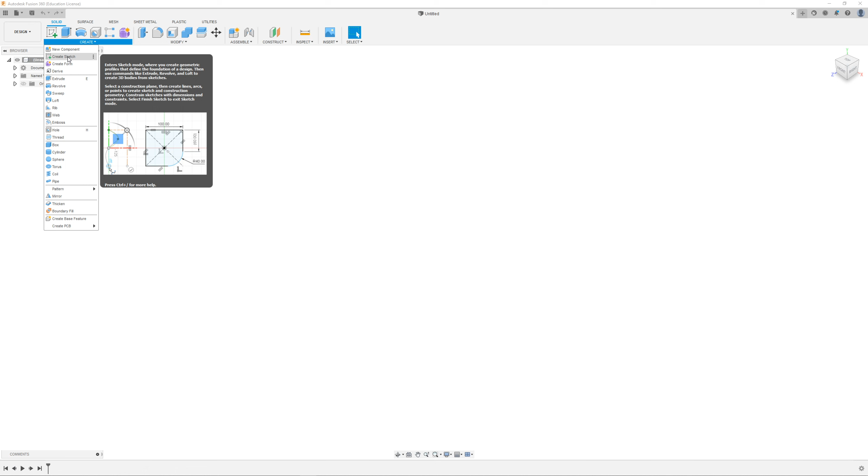So we have here Fusion 360. The first thing we're going to want to do is start by making a new object. So to do that, we are going to press create. We're going to make a sketch, and we're going to sketch in the ZX plane over here. And let's just pick a 2-point rectangle.

I can press this as my starting point, and for the dimensions of my particular piece, we're going to make this out of core flute, but the approximate dimensions, let's say, are 200 by 13 - that's probably a bit big. 200 by... that looks a bit better. No, let's just do that. So 200 by 100 millimeters is the length of the core flute, and we'll get some sort of exotic shapes out later.

So let's press this home button over here in the top right hand corner, and it's going to give us this view so we can see that looks right. We're going to finish the sketch, and so now we have our drawing. We used a rectangle, and because we closed it off, we have the blue border, so it's a blue fill in the inside. Depending on what version of Fusion you have, it might also be yellow, but the point is it's clearly a solid color. So let's make this into a 3D object.

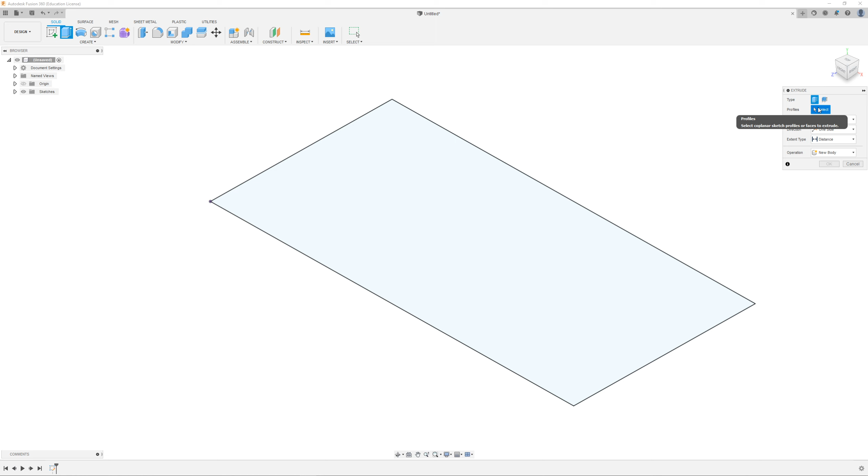Let's go Extrude, and by default we already have this selected. If I didn't have it selected, let me just press the escape button a few times. I'll press Extrude. Let's say I have nothing selected, or when you have multiple shapes and sketches, over here the profile, which is the shape that you want to make into 3D, you're going to click this face over here, and you can click and drag and make it into a 3D object, but I know that our particular piece of core flute is 5 millimeters thick, so I'm just going to press 5. And then everything else here is fine. We don't have to do anything else. We're not tapering it.

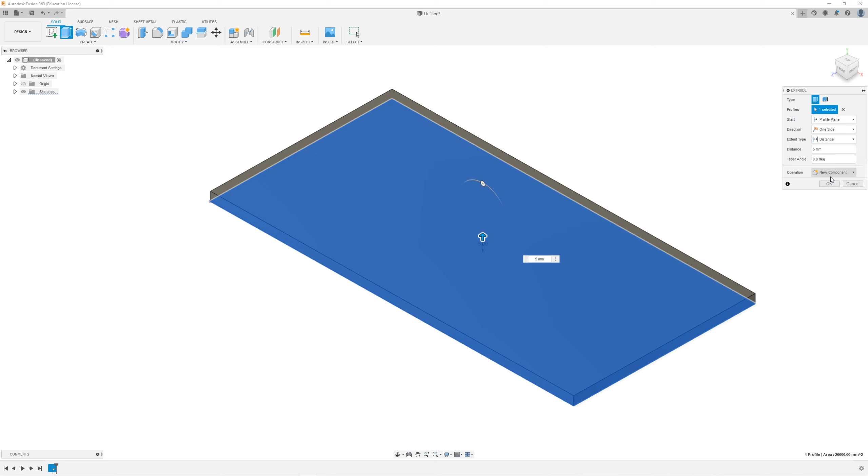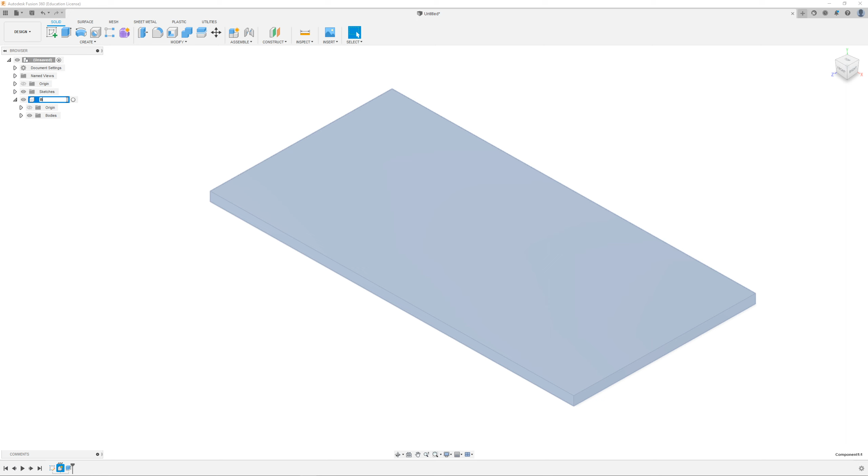We're going to make this into a new component instead of a new body. So press over here, we're going to press new component. This will allow us the option to, if we want to get joints or other components to move relative to each other, we need them to all be individual components. And we press OK, and then if we look over here on the side, we have this is our component, so we can hide it, so that's how we know that that is the component there. And we can rename it by triple clicking it, and we're going to call this the base, so we know what part we're talking about.

So that's our core flute, and we can right click this to make this a physical material. We'll right click this, go to physical material, load up some materials here, we want to make it out of a plastic, and we want an ABS white plastic - this one is probably fine, but let's see if there's any other options. Now core flute, I'm not sure if it's made out of ABS, but it will be good enough for our purposes. So let's just go get ABS plastic. Now we can just click and drag that right over here, and now it's a nice white surface. It's going to look good when we do a rendered drawing.

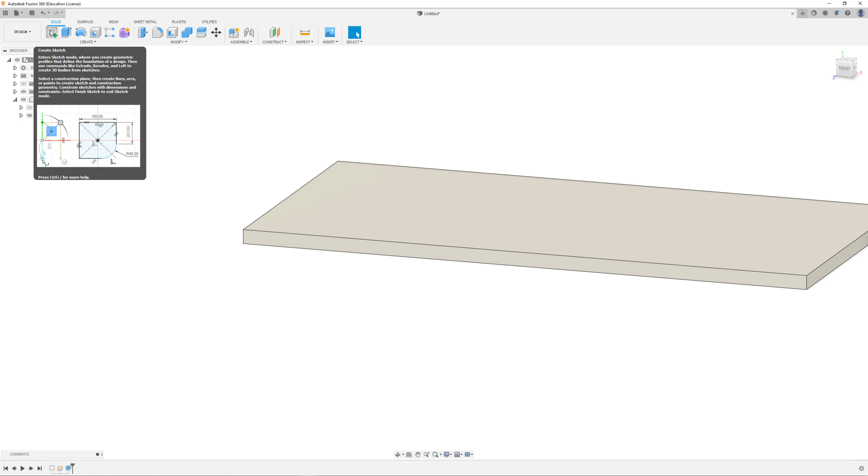So core flute is a piece of plastic that has holes in the middle, so it gives itself relatively good strength for light weight. So we're going to press the sketch button again, and we're going to click the side of our rectangular object over here, and we are going to make the holes for our core flute. So the first thing I'm going to do is I want to make a 5 by 5 millimeter square. I want to get this, I'm going to basically copy this several times.

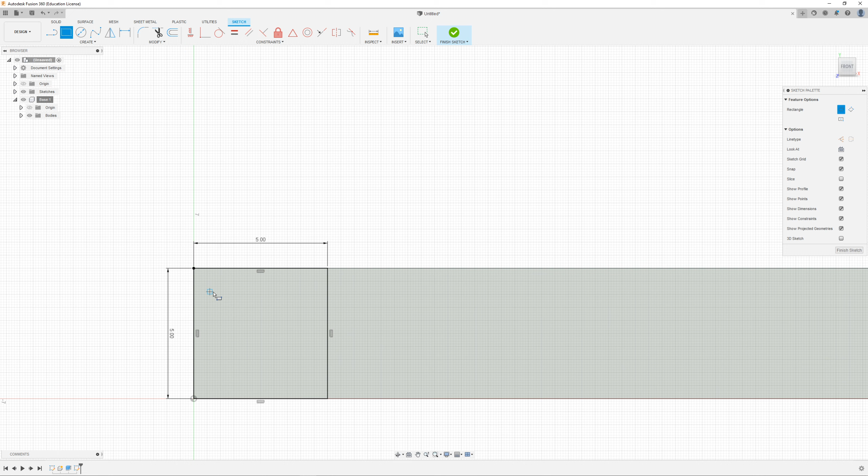So our core flute, let's make a square inside here. How big do we want this internal square? If we make it 4 by 4, that means we've got 1 millimeter of core flute material, which would be fine. If we were to press OK, this would be fine.

The only issue is if we copy this, which I plan on doing to show you the copy tool, see how this wall over here is going to be twice as thick because it's like two pieces of core flute next to each other.

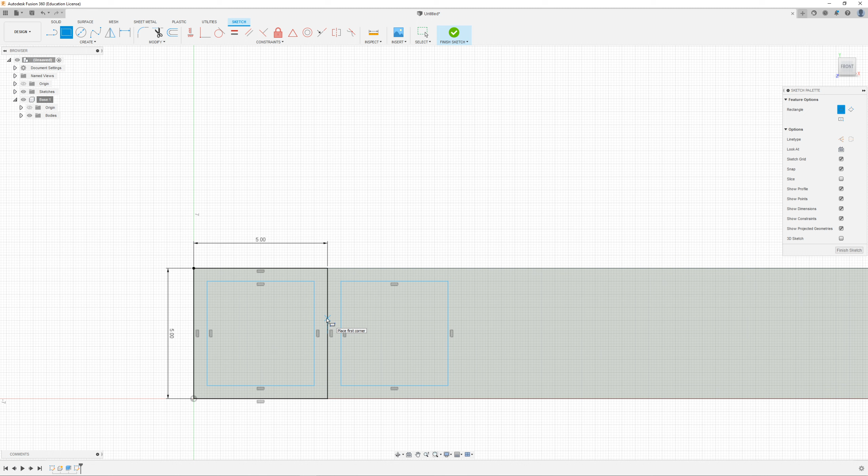So let's modify it. Instead of the core flute being 4x4, we'll press this dimension button. This wall to this wall, since it's 0.5, we want it to be half that size, so we can go 0.5 divided by 2 to give us this length, and we can do the same thing over here, making this 0.5 divided by 2. You can plug in formulas into this text box for Fusion 360.

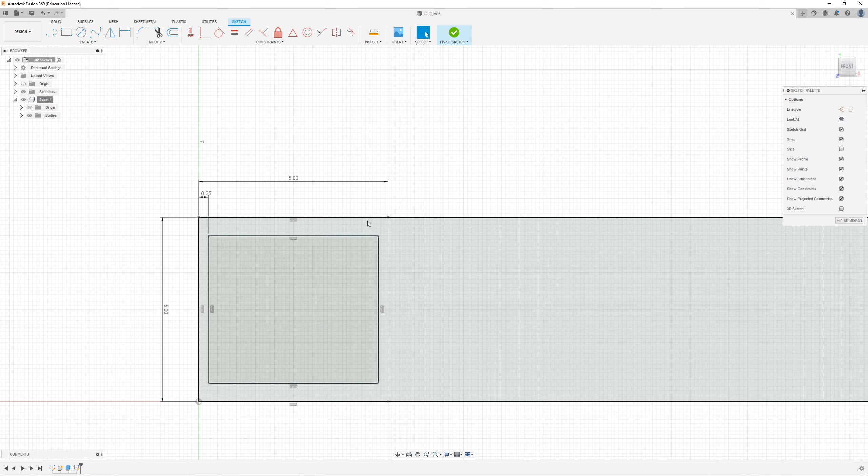I want to delete this other shape so it's not confusing, and also delete this wall and these additional lines because we don't need them anymore. So we have this - it's not exactly a square anymore, it's slightly rectangle. What we're going to do is copy this down our entire piece of plastic so we don't have to draw the individual squares.

We are going to use the rectangular pattern tool. If you press the create button down here and go down to rectangular pattern, it says it duplicates a sketch curve in rows or columns. So click the rectangular pattern. The objects we want to select are all 4 of our lines in this particular example.

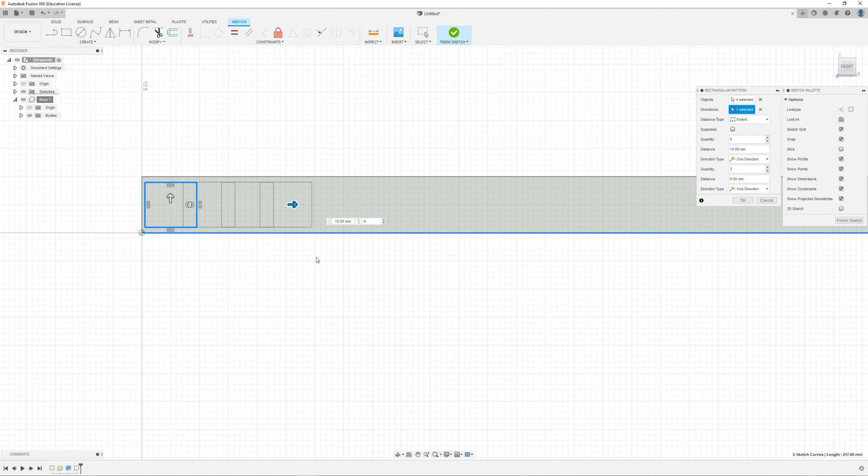Then we want to pick the direction, following either the top or bottom line. Let's do it to the bottom. As we drag this line, see how we already have these squares showing up. So what we want to do is increase our number, and then we can move them so they sort of fit.

One of the options we have here is we've picked extent, which means for this particular length - let's say 50 - it puts 9 or 10 copies for 50 millimeters. Now if I change it to 11 copies, it tries to fit that many inside that extent.

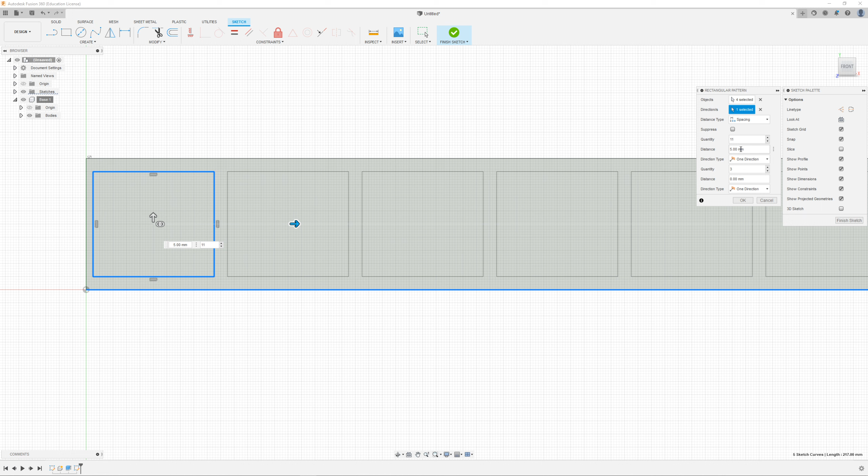What we want to do is instead of extent, change it to spacing. So it says for this shape over here, how long till we go to the next shape? Our square is 4.5 millimeters long, so we want 4.5 plus 0.5, which gives us 5 millimeters.

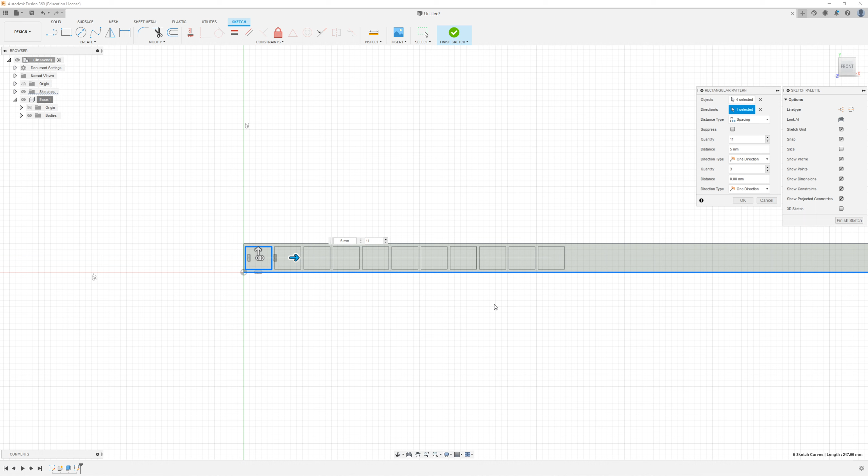Cool, we've done that, and now all we have to do is just increase our number of them until we get to the end of copying it, until we get to the end of our piece of core flute. Then we press OK, and now we automatically have all these rectangles. Now let's finish that sketch.

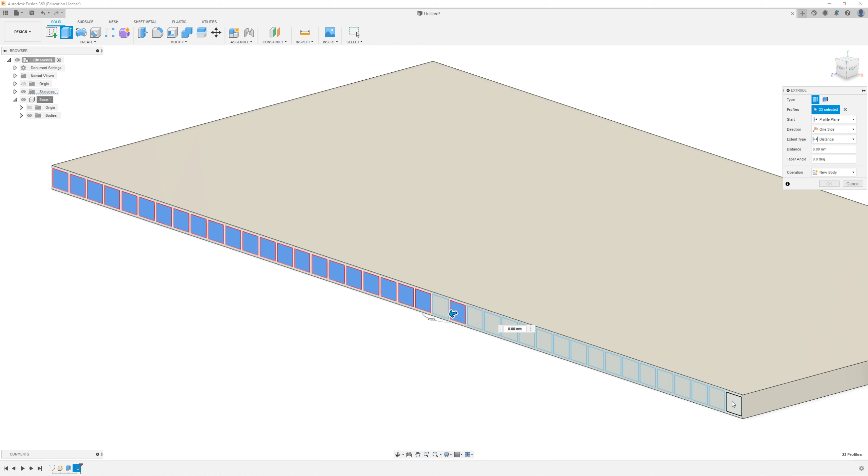So we have these rectangles over here. Let's go press the extrude button again, and we want to select all these squares. Alright, we've selected all these squares.

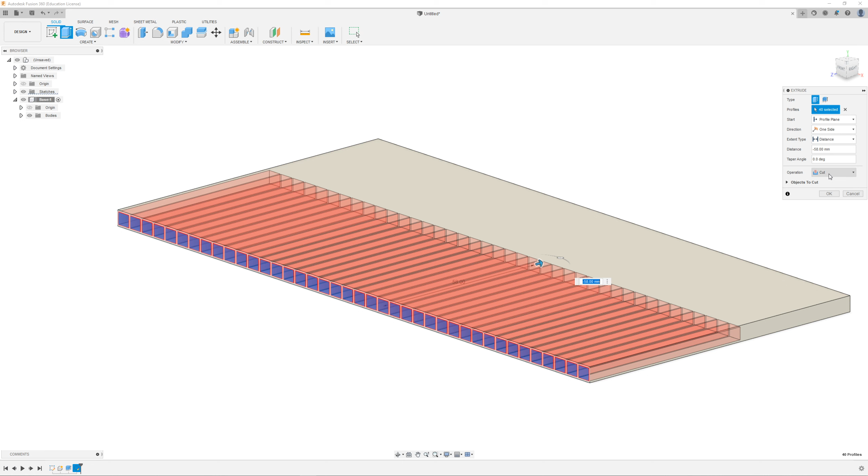Now, when you automatically pull out in Extrude, it's going to make it join, so it wants to make a new object. Instead, we want to bring it into the model, which changes this to cut. So it's going to cut a hole out, which is what we want with our core flute. If we just drag it all the way through the product and press OK, we have now a nice piece of hollow core flute, which will start to look very nice and will mimic our actual model quite nicely.

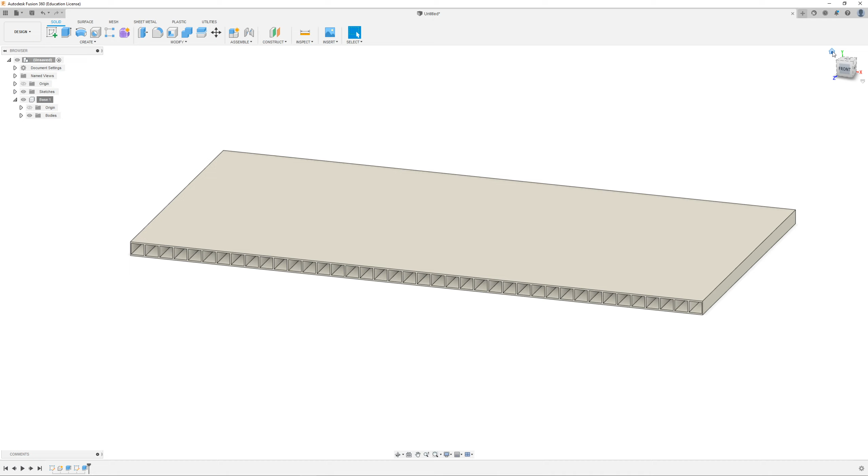We can also, let's go back to our 3D view. Let's say we want to make some interesting cuts - let's say we want to make the front look a bit more sporty. Let's go back to create sketch and press the top again.

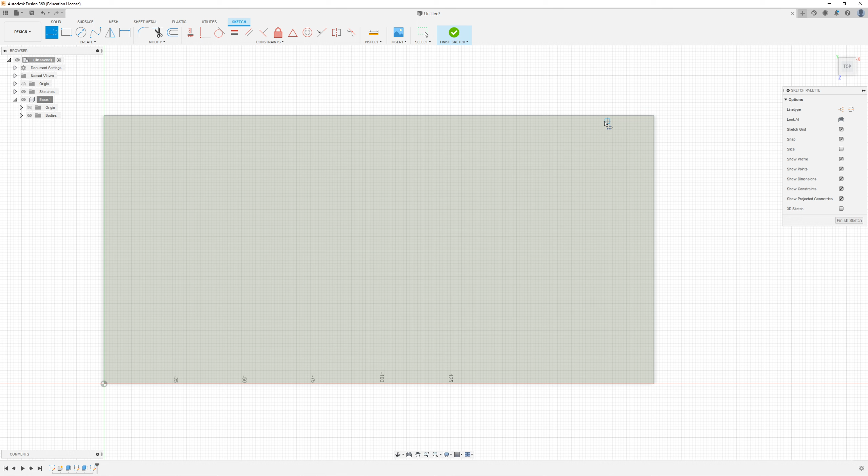Let's say we want to make like a 25 by... we want to make this little angle bit over here, so we want to cut that out of our object. And let's say we then want to be super fancy and also get a fillet over here at the back, so let's make an arc.

We want to press the center over here. All we just want to do is make the back smooth, just to show off things we can do. So notice this shape over here.

Let me just hide the body to explain what I'm saying. Where is that original sketch? We don't want that original... oh, we do want that original sketch. So we want to finish this sketch, and now

we want to cut these two corner bits off. But notice how they're only going to be on one side of the car, so we're going to learn how to use the mirror function as well.

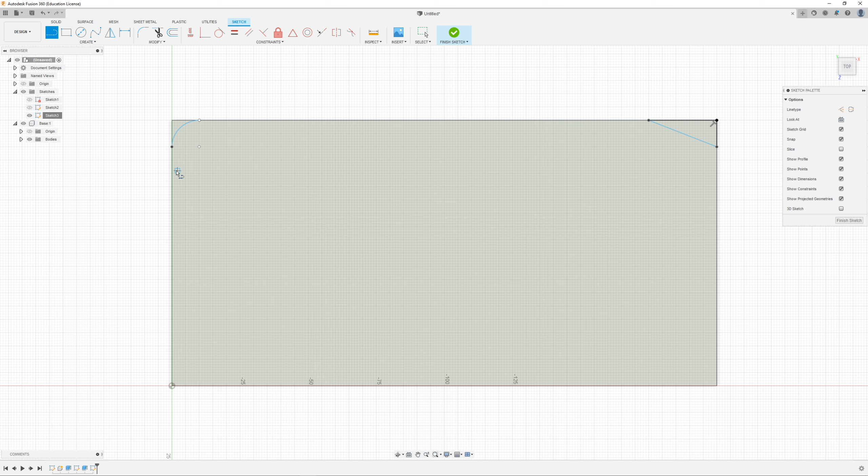Let's go back to that sketch. We can right click that sketch, edit sketch. We want to find the halfway point. If we scroll our mouse down here, we should get to the halfway point, which is what that triangle represents.

Let's just draw that line down here. And we're going to use this tool over here, which is the mirror, which we can also find by pressing down on our create to get mirror.

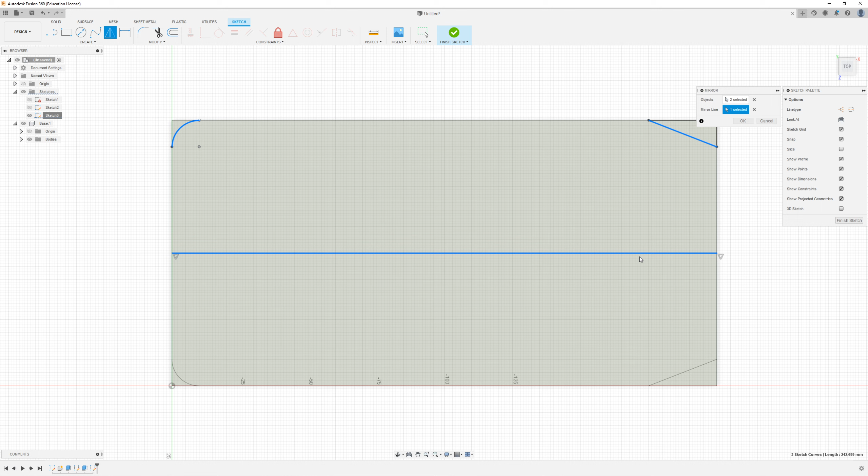We want to mirror this line and we want to mirror this line. So we have two things selected and we want to mirror it down here. So now we have the mirror down there. And if we press OK, exit this sketch, we are going to do the same.

We're going to use the extrude, and we can do the same thing. We can extrude this down and cut it out and it would look cool. But let me teach you another thing that you can add to your arsenal.

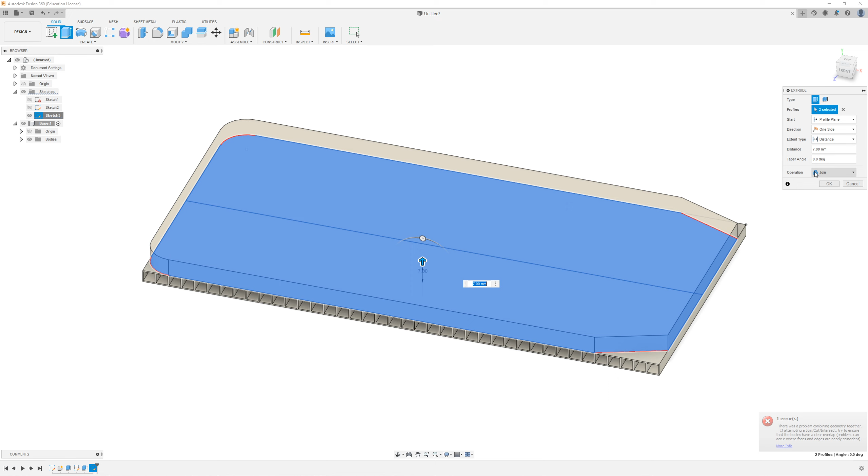We can go extrude. Let's say you want these two inner pieces. By default, we're going to cut them down, which the drawing doesn't like at all. But what we can do instead is we can do intersect.

So what it's saying is for this particular surface, intersect is saying as you go through here, find in this model the parts that overlap between if you were to extrude it and the previous model.

And if I press OK, now we have this nice looking piece of corflute with the extra effort we put in to make these holes. Makes it look really, really nice for our car.

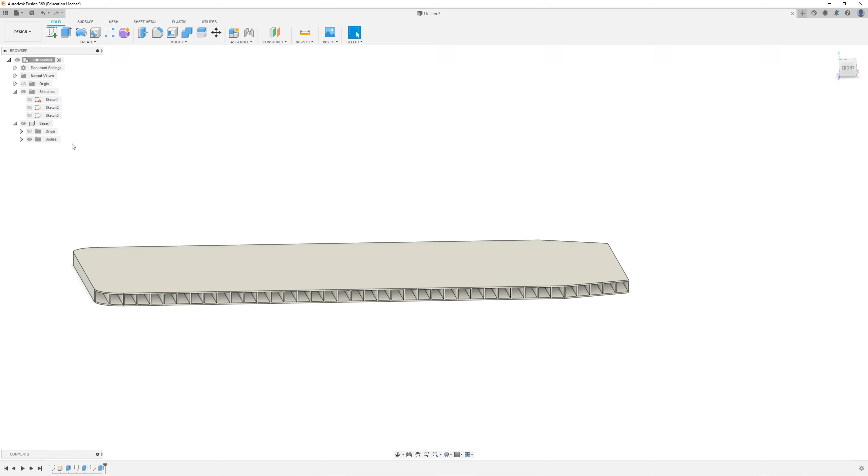Let's go and make a wheel now. So I just want to hide this base, so I don't want it to interrupt our sketching. Let's go press our sketch button.

Let's pick a plane that works for us. Let's do this plane over here. So we want to do this wheel, and let's do just a very simple wheel design.

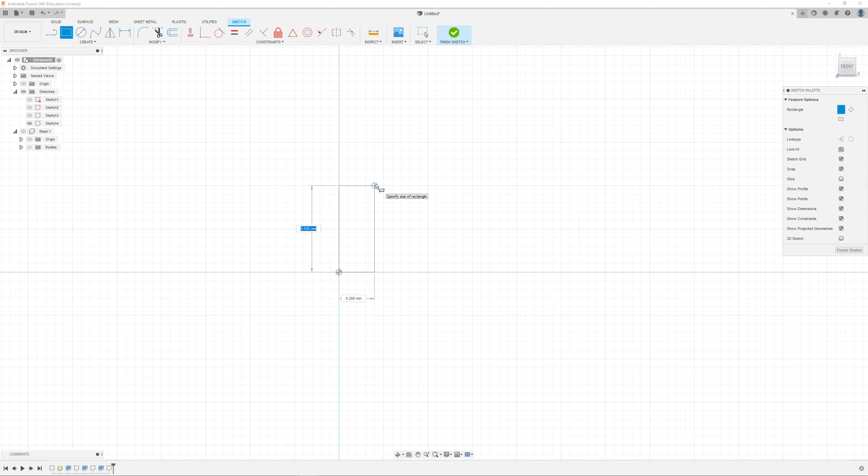Let's say our wheels are, I believe, 50 millimeters. So we're going to do half the wheel and we're going to rotate it. So we want it 25 millimeters high.

Oh wow, we're really zoomed out. 25 millimeters high, and our wheels are 20 wide. And so we'll press OK, and then we'll finish that sketch.

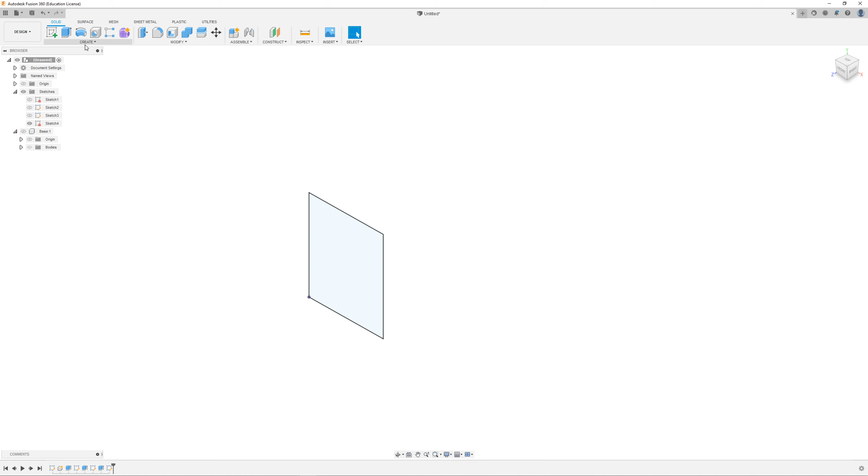We'll go to press the home button. We want to use the Revolve tool. Press the Revolve tool over here, we get a sketch and we rotate it around a particular point. So we can press this Revolve tool over here.

We select that face. The axis we're going to select is the bottom. And if we press that, it makes a nice looking 3D wheel. So this is a very good basic wheel shape we have here.

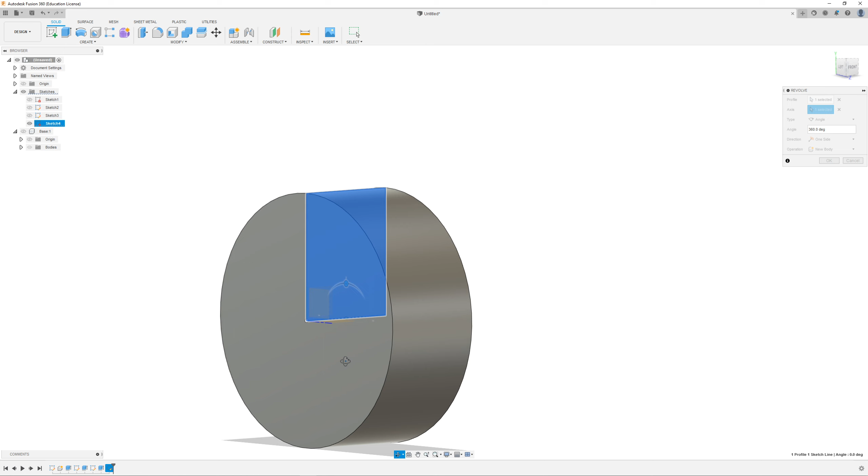But we can also start to be clever and get some free detail into this. So let's go back to that original sketch that we had, this one over here. Edit sketch.

So we know we're going to revolve this sketch, and so we can start using the line tool, and let's start just making a wheel that is going to start to look cool.

So we have this line over here. We know that our wheel goes down to this point over here. I believe actually we can go all the way down to the bottom basically, and then we can bring that out there.

For the outside part of the wheel, let's say we want a line over here, and then this one goes out like that, this line goes out over here.

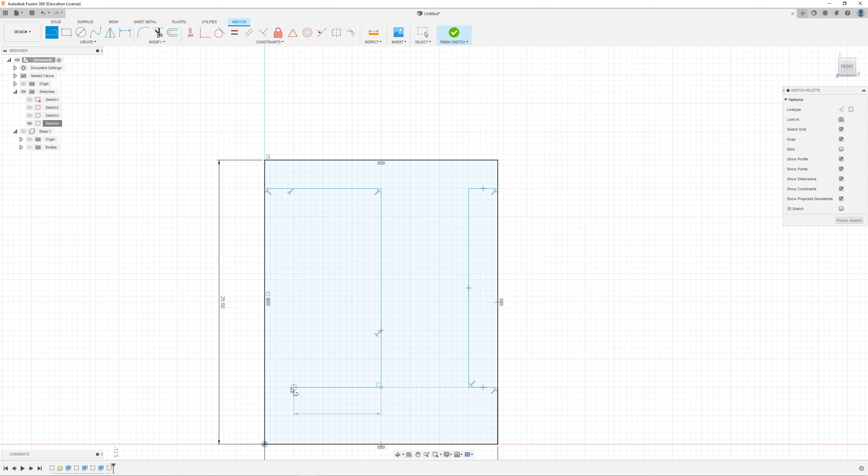We know this wheel is going to accept an axle, and I believe the axle is 3 millimeters thick. So because we assume the axle is 3 millimeters thick, we know we're going to have a little bit of a hollow center. So let's get a line that is 3 millimeters divided by 2, which is 1.5 millimeters, and so we want the wheel to be hollow.

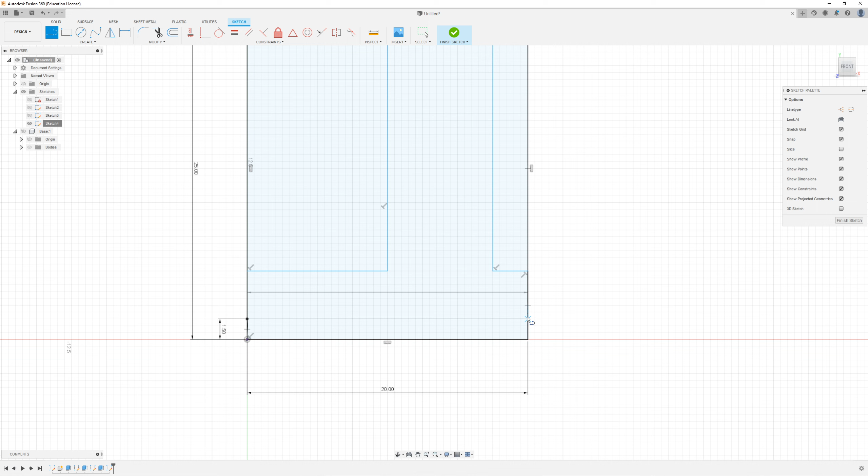Let's say for this particular model, I know our particular wheels in the workshop aren't hollow all the way through, but let's say some of them are, so it's going to look cool. So this is our shape. It looks like a weird looking I.

If we finish that sketch and go into 3D, we can do the same thing with Revolve. We just want to press this inner shape, and we want it to revolve around here. So now we're starting to get a nice looking wheel that looks similar to the wheels you see in our workshop.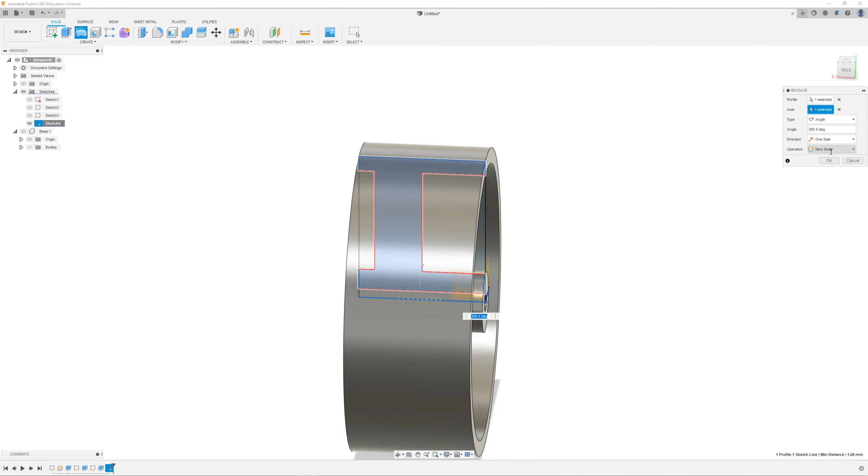And again, we want to make this a new component, make it into something into 3D. Cool, we have this lovely component over here. This is our wheel, and we can also start to add some extra features to this wheel.

Let's say this particular wheel, if we open over here, we can go to bodies. This particular body is going to be black ABS. So let's say ABS black. We want this, and then we know that the outside of the wheel is going to have rubber. So let's make the outside of the wheel while we have this model.

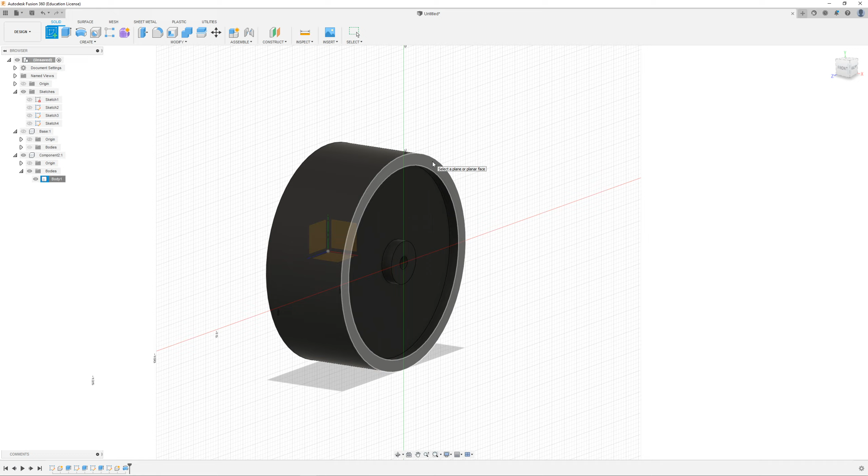We'll go to sketch, and then let's press this surface over here. We want the outside of our wheel to be, let's say, 2 millimeters of rubber. Finish that.

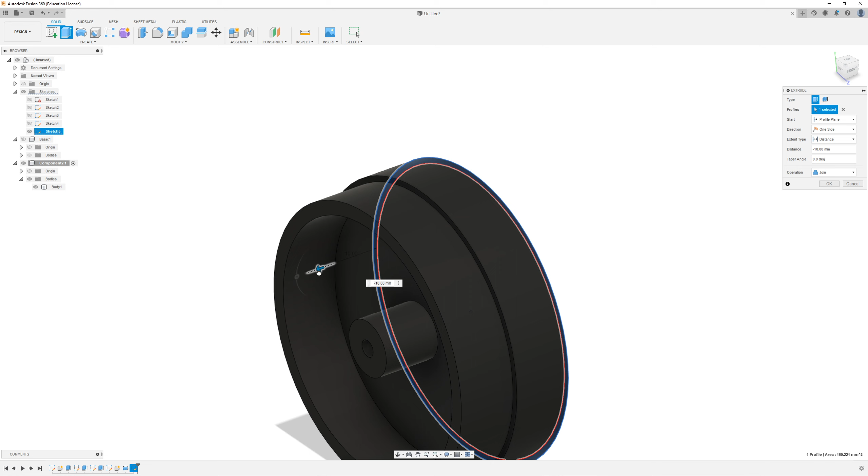We want to press just this surface over here. We're going to extrude this, and we want this to go over the entire length of the wheel. And we don't want this to join. We want this to be a new body.

Oh okay, this is a new body. But the problem we have here is this is the component that we just had, the wheel. When we made a new body, by default it wants to make the bodies in whichever is the active component. And if you don't select an active component, it's going to want to be produced in the origin.

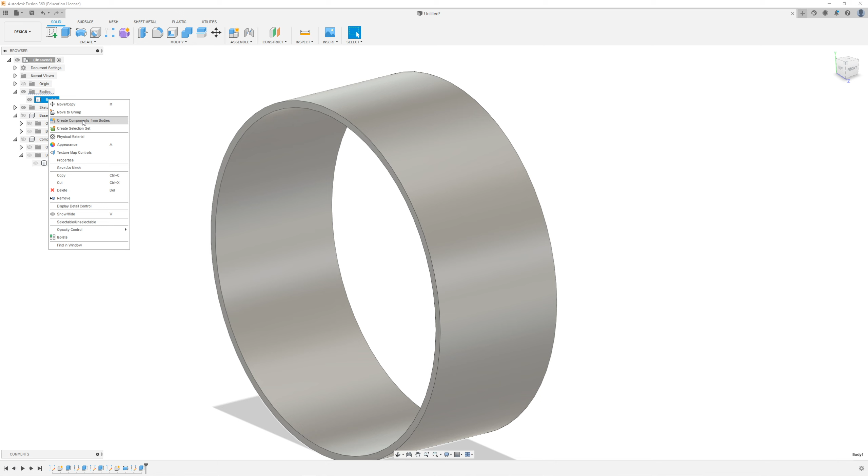So see over here, if we hide all these individual components, the origin is what you begin with in your sketch. Let's see if you can drag it down. Can I drag this into here? Can I right click it and make components? No. Okay, so let's undo what we did there.

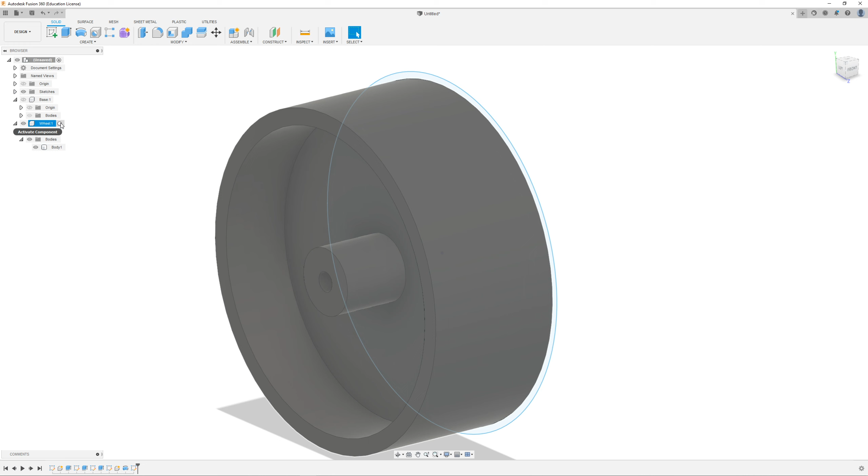So before we make this, see this little dot over here? If we bring our mouse over to this component number 2, which while we're here, let's rename this wheel. If we go near the wheel, we see this white dot over here. If we click that, that means this is the active component.

So if we press this surface again and go to extrude and make it through here, again by default it wants to join, but we want this to be a new body. And so now if we press OK, there we go. This particular component has 2 bodies in it. This is why, or when, components involve multiple bodies or multiple parts.

If you think of it, a scissor has both the metal chopping parts and where your hands are gripping onto it, which is a plastic part. Each of the blades of the scissors would be a different component because they move relative to each other, but the plastic handle and the blade it's attached to are not moving relative to each other. So they can be separate bodies in the same component.

So this one over here, we can rename this body. This could be rim, and this can be, let's spell tire the British way. This could be the tire, and when we do the tire, we can right click, we can make this physical material. I think we have rubber, but where would rubber be? Rubber might be under miscellaneous. No.

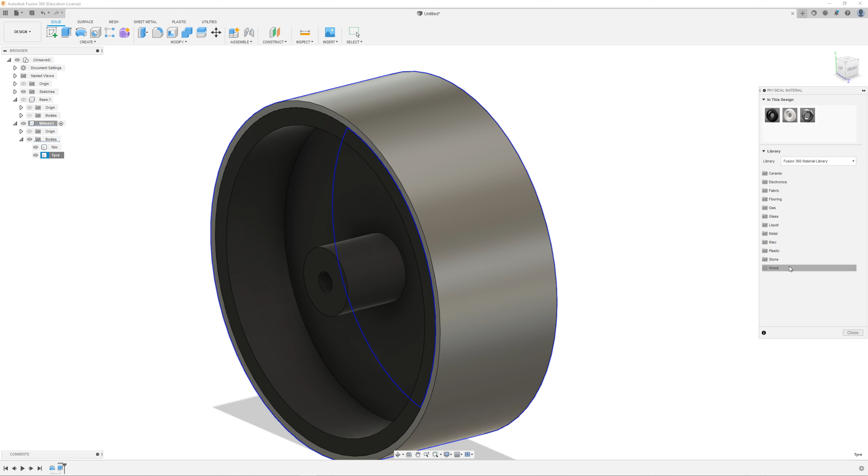I hope rubber's not under plastic. Oh, it is. If you put rubber here, we have rubber, and it already has a different texture that rubber has. That's going to look really nice when we do our drawing.

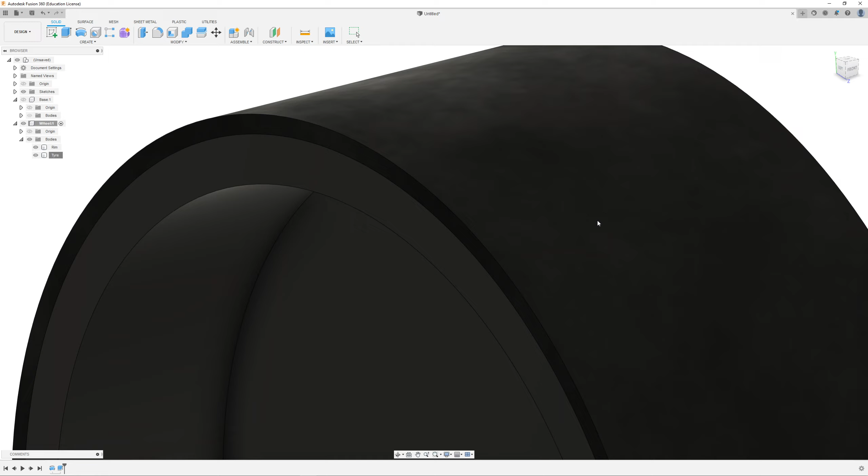I pressed close, done. Let's say we also want to make this slightly more lightweight. We are dealing with a solar car here, so weight is of some importance. Let's say we want to make some speed holes inside here, and attack this with the power drill.

Let's go create a sketch on this surface over here. Let's say we get a power drill and press here. We want to drill an 8mm hole into our wheel over here, and we can just pull that through, as we've seen with our holes in our Coreflute.

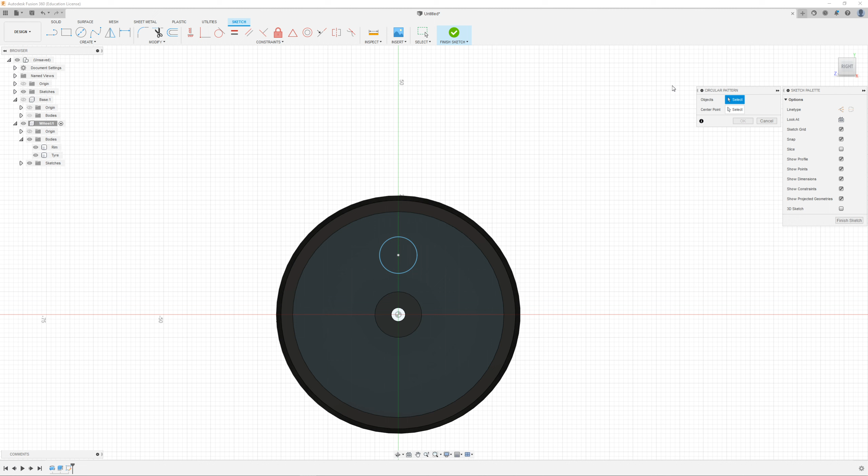We can do it in a circular pattern as well by pressing circular pattern, in create circular pattern. The objects we want to rotate is this disc over here. For the center point, we can either pick the very center here, or we can pick any circle, and it's going to assume the center point it rotates about is the center of the circle. By default we have 3, let's get 6 and press OK.

Now we can press these, so we can finish our sketch. We can go to extrude, press these 6 that we have here, cut those through, and press OK. So now our wheel is going to be lighter weight because we cut those holes inside our material.

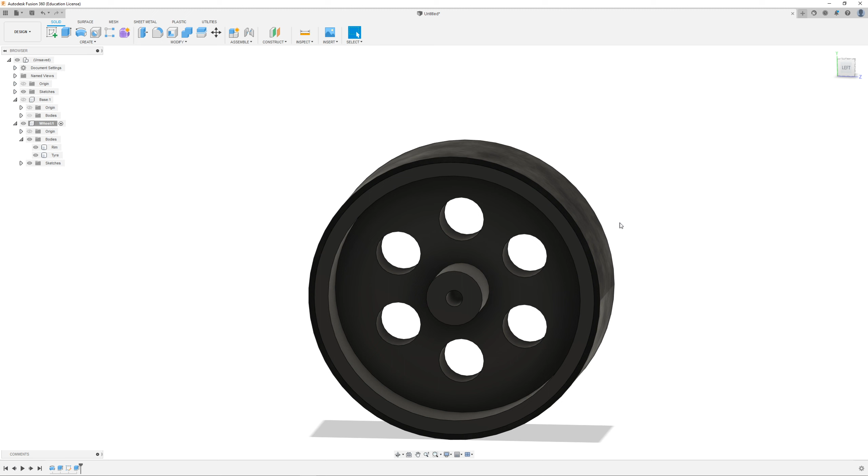We have our wheel here, so let's look at our original base, and we see, oh no, that is not a good position for our wheel to be in. So we can move our wheel, but before we move it, let's get the axle and the collar. I think it's called the collar, but we have our metal axle, and also a blue plastic straw that it goes into to allow it to rotate.

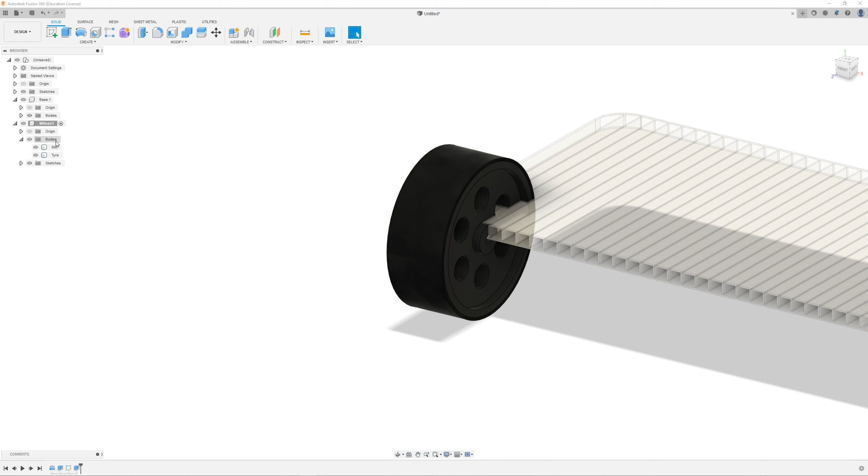Let's make those first, then we can just snap our wheels right onto those components. So let's just hide our wheel for now. Now we are going to make our new component. Let's deal with this active component over here, which is the base, whatever. Let's go and sketch on this plane over here.

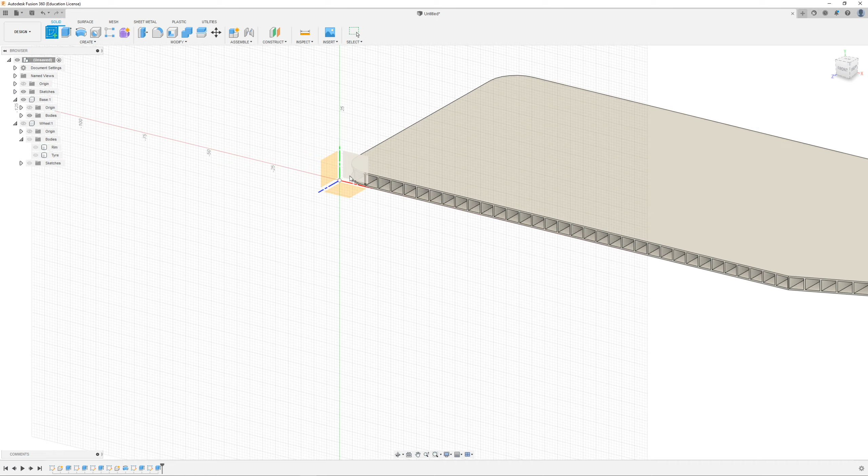So I know we're going to get this, it's like a straw material, a plastic tube essentially, and this plastic tube basically fits inside here. So what I'm going to do is measure it. I already know what this length is, but let's say I didn't. Okay, 4mm, I click this over here.

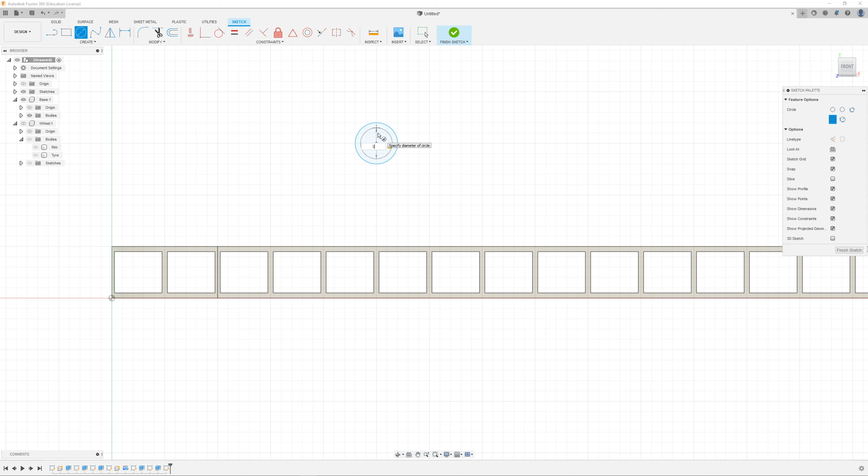I just want to make a 4mm circle, and I already know the size of the axle on the inside because when I made my wheel, the axle diameter is 3mm, so I can press 3. That's my tube there. I can press finish.

Let's go into 3D. We want this to be a tube. We want to press this, and make this axle go through. The length of this axle, well, we know our car is 100mm, so let's make this slightly larger. Let's say we make this 105. It doesn't matter that it's all the way out there.

105 is going to be slightly annoying. Let's just make it 100 so we can fit it inside. I can show you some cool things. So this is our plastic tube, and this has to be ABS white as well, ideally a whiter white than the other one.

Oh, I made it into a body. That's fine, we can fix this. I did that mistake on purpose. This is the body over here, that we're going to eventually make the axle to connect into.

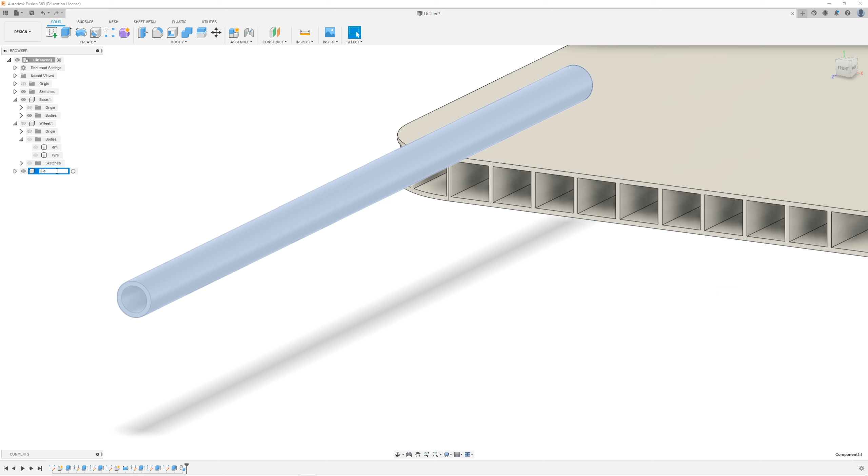We can right click this part over here, and say create a component from this body. If we click that, it disappears from the bodies over here, and becomes a component down here, which is what we want. And we're going to call this sleeve. This is going to be the sleeve that the axle will rotate in.

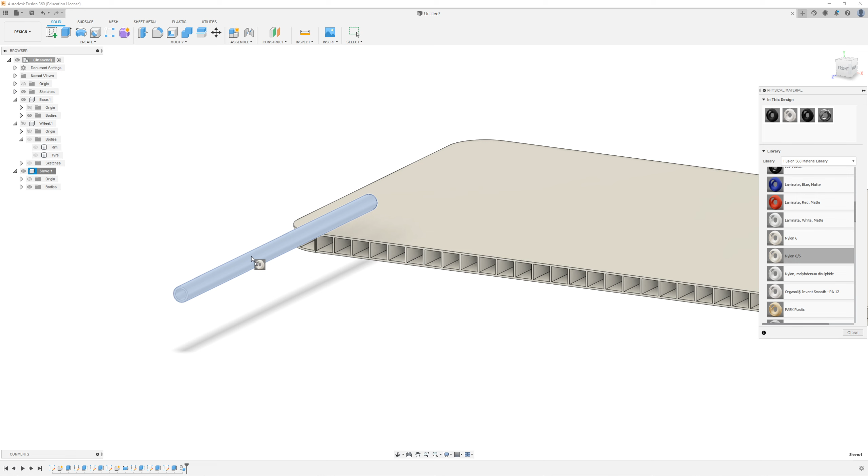We have this. Let's right-click the sleeve and make it a physical material. Let's look at our plastics - resin would be nice. Oh, nylon 6/6, now that's a good plastic. Oh, it's even a different type of plastic, yes, different color.

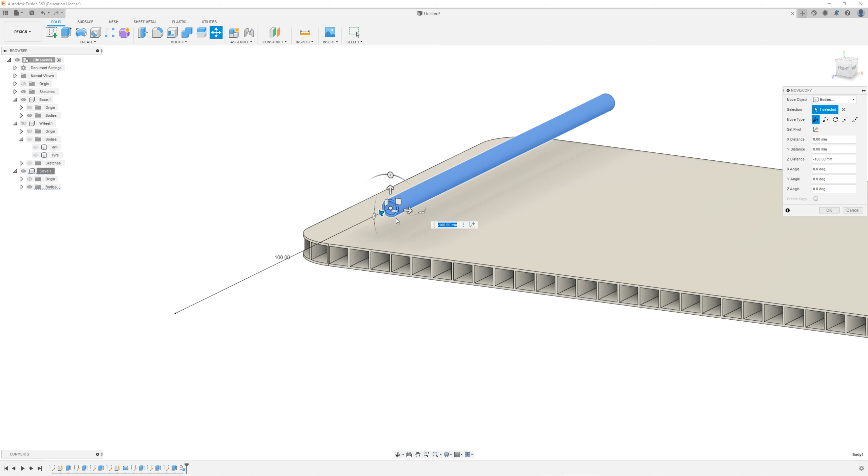All right, we want this to go inside there. We want these to go inside the Corflute, because that's just a convenient place in our design. We can press the move and copy button, press this, and then we can manually fit it to where we want. It's really good if you know the actual dimensions of things, and I happen to have every part of my drawing accurate to 1 millimeter, so I can line it up quite easily.

Your other option is you might want to align it. So let's say before we do the move, we want to... oh, did you get rid of that color? Thank you, redo. I might want to align it, so let's go to the modify menu, let's go to the align tool.

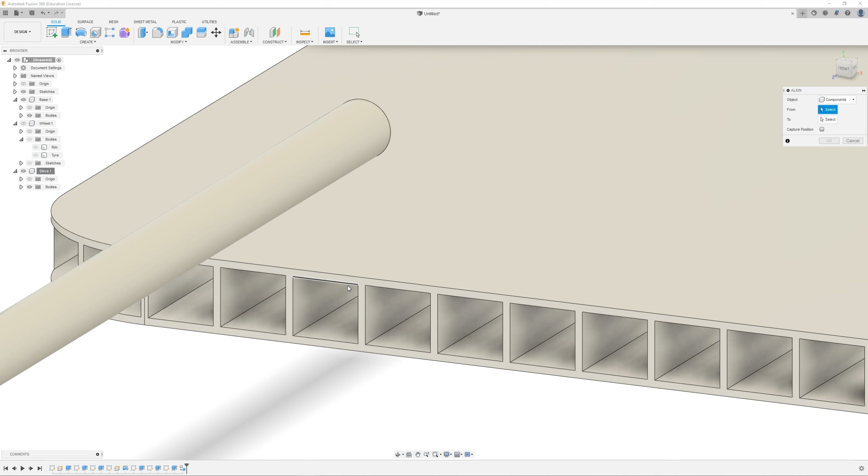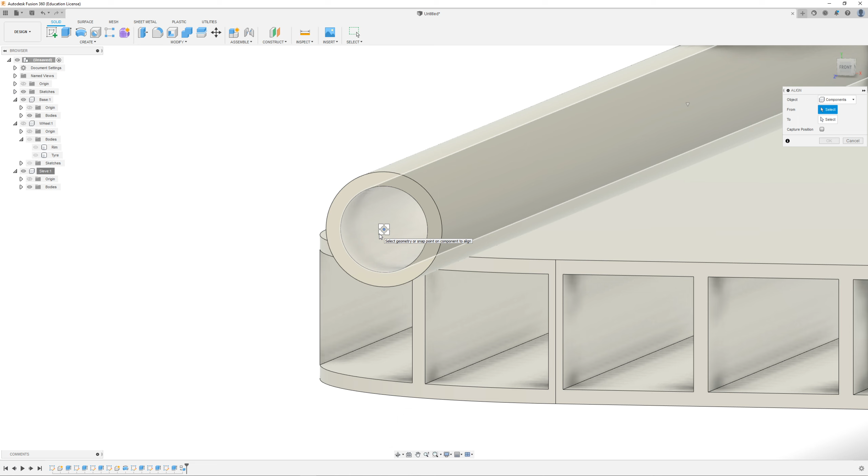I want to align this into this square. Which square do I want? This square over here, so I can press this. As I mouse over things with the align tool, it starts showing shapes. Let me zoom in so we can see that better. As I hover over here, it says do you want to align this, which in this case is the face of the circle at the edge of the cylinder. I can click this and it asks where do you want to align this to. Well, I want to align it to this particular part over here. Okay, it's aligned to there.

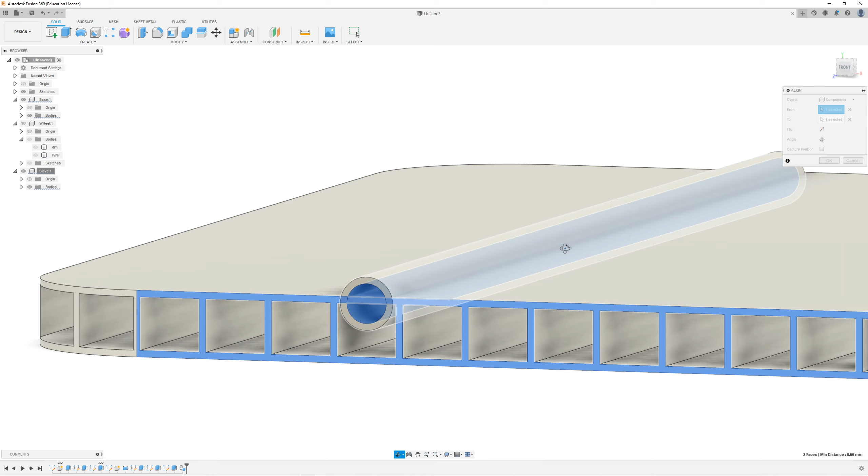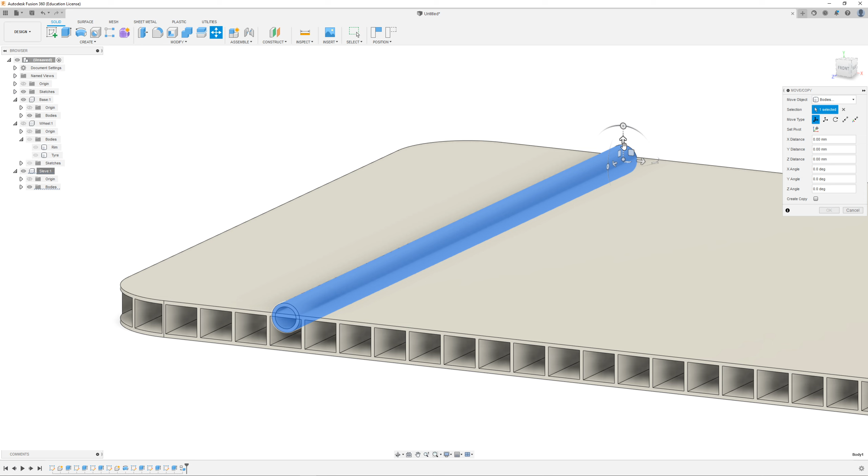So I already have one dimension set, which is going to be more useful when we start doing our axle later. And then I know I'm going to have to manually move it down, so I can click the object and go to move and copy. I want to move this body down until it fits inside this block, and then press OK. So now I have that.

I can now make the 3mm axle, that's going to come out as well. So we're going to do the same thing, sketch, and because I moved an object, it's going to ask me: do I want to keep my original moving of the object, or do I want to keep my current position, or revert it back to the alignment function I had previously? So I want to capture the current position because I moved that object down.

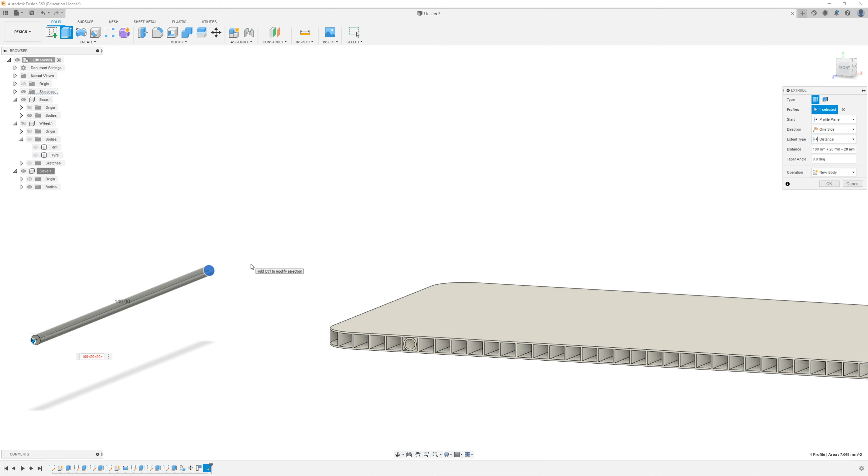Let's go and make this 3mm axle. Enter. Now this one has to be longer. I believe the width of our wheels are 20, so if I extrude this, we should have 100mm plus 20 plus 20, plus let's say we want 5mm clearance on each side, so plus 5 plus 5. This is going to go through the entire length of the car, it's a long axle.

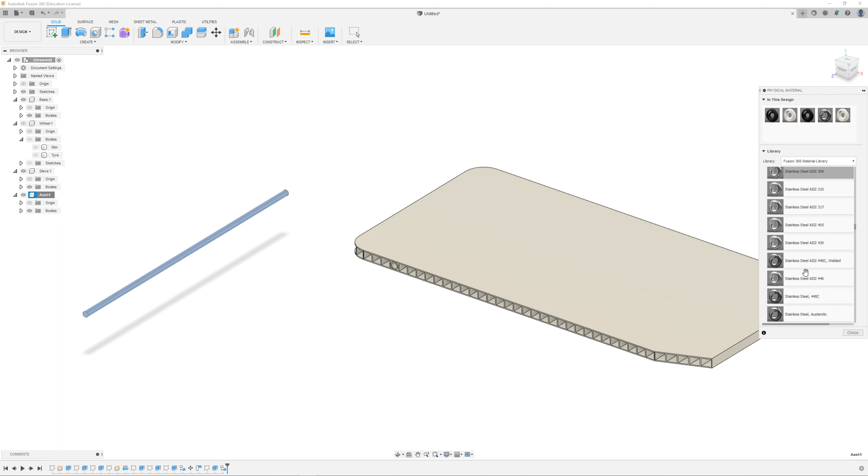And this one, we did the same thing - we should have made a component out of it. This is going to be called the axle, and what material are you going to be? We can make this out of steel, so we can go to metal, let's scroll down - iron, stainless steel. Ooh, do we dare to get stainless steel? Let's just go normal steel. We can have a nice steel axle.

This one over here is going to be easier for us to align, because if we go to align, we can press align, press this face over here. We know it's going to be aligned in here, so we can press that, and our axle goes in here. And oh my gosh, what is this? I mean, I'm being facetious, I know what this is - the axle is longer.

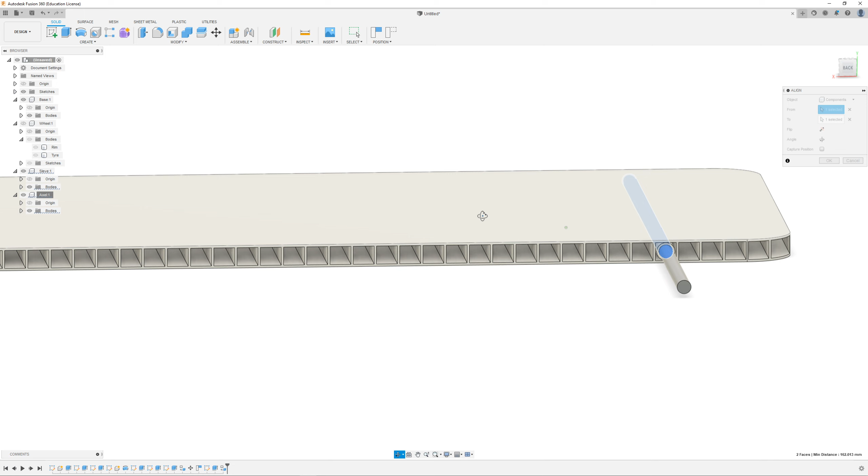That's fine, we can press OK. This one we're definitely going to have to drag it to get our shape that we want. We know that if this is our zero length over here, and if we go all the way in, that is 50, so we just want to move it half of that distance. 50 divided by 2... we want it to move minus 25. Thank you, and so now that should be perfectly halfway.

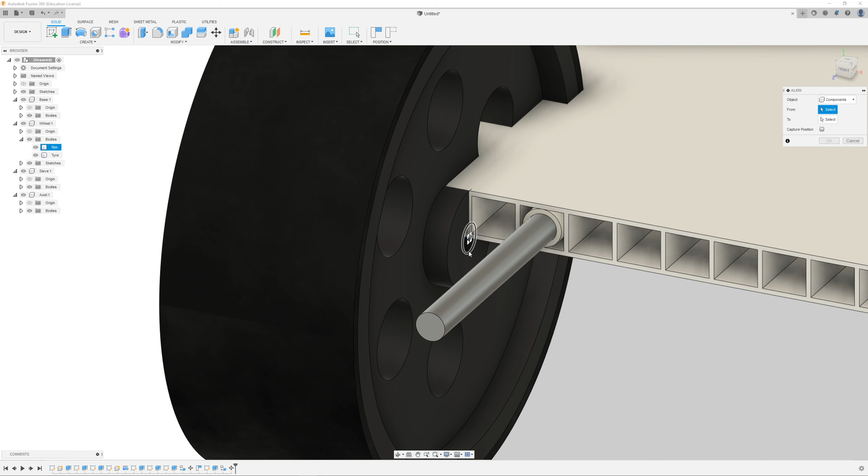Now we can look at our wheel. Where is our wheel? Hello there, Mr. Wheel. We can do the same thing. We can now align our wheel to that axle, to that point over there. We can press align. We want to align this shaft over there with this. Nope, I pressed the wrong button. We can press align, we want to align this shaft with this. And so we have the axle on, and I believe it's done it in the reverse direction, so we can press flip, and there, look, we have a nice looking wheel on an axle.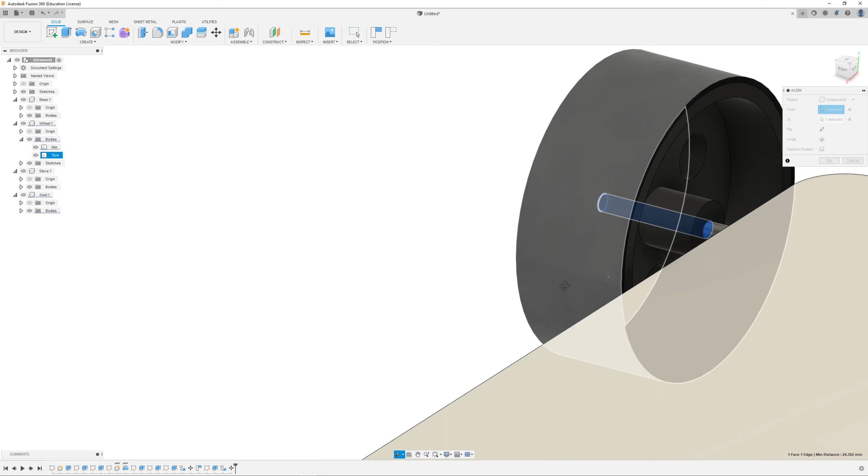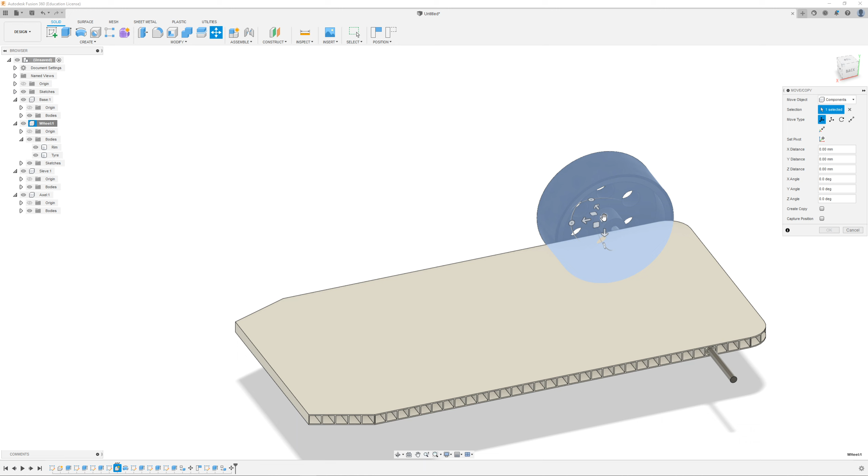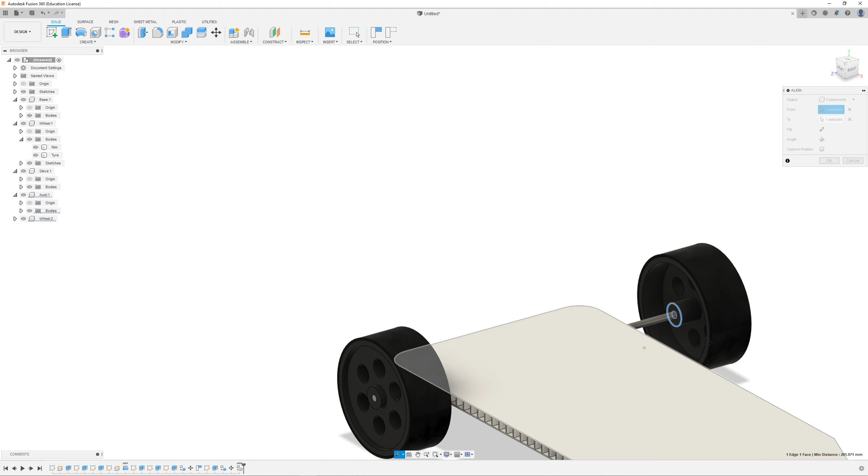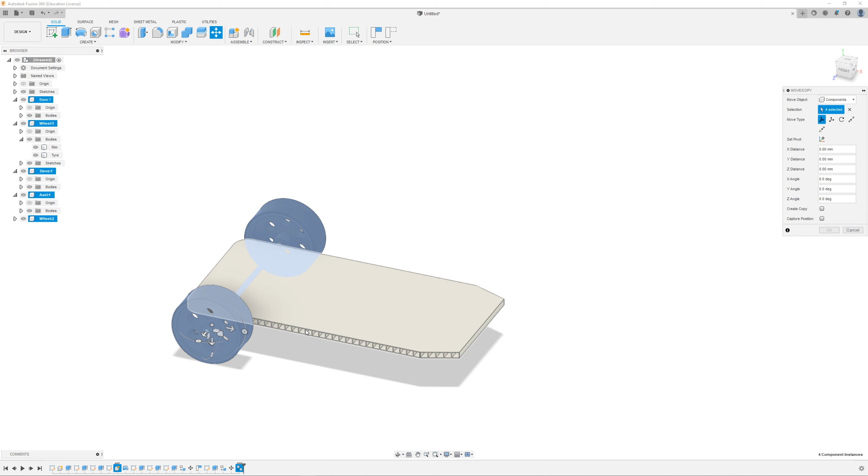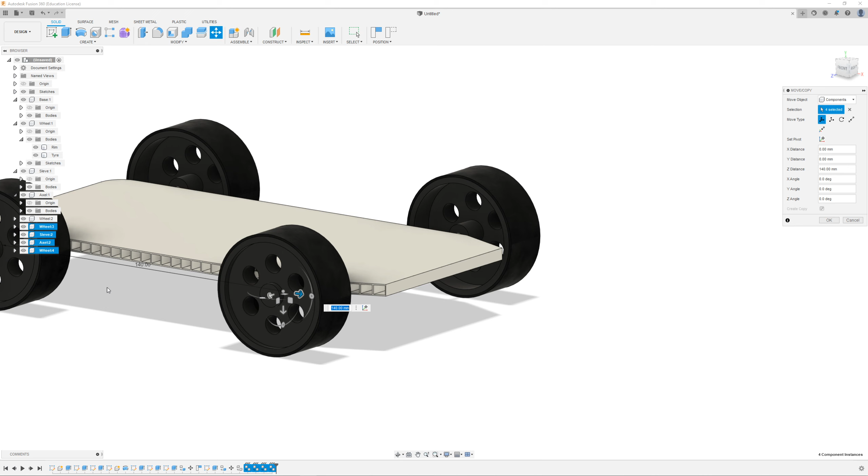And actually we can go super cheaty now, and we can press move or copy. We can select components. We know we have wheel 1, wheel 2, axle 1, sleeve 1, and we can just... wrong button, sorry. Components, we want wheel 1, sleeve 1, axle 1, wheel 2. We want to press make a copy, and this one over here, we want to make a copy further over here at the front. All we want to do is make sure we hide this wheel just to make sure that we are aligned perfectly. That looks really nice, and so let's bring that back. And so we have all 4 of these wheels in here.

Cool, next thing we need to do is we have to have a motor somewhere in this model. So let's go press create sketch. You have the advantage of being able to measure a motor on you, so I'm just going to guess what my motor looks like, and from memory I believe the motor looks something like this.

So I'm just making a circle and a square because this motor has a flat top but curved sides. So I'm going to extrude this. I want to press this shape and this shape and this shape, and then the motor is about 30 millimeters. No, that's way too long. That is a small motor. Must be 2.5, 25... 25 looks... I think the scale of my motor is a bit small. We'll go with 20, we'll press OK.

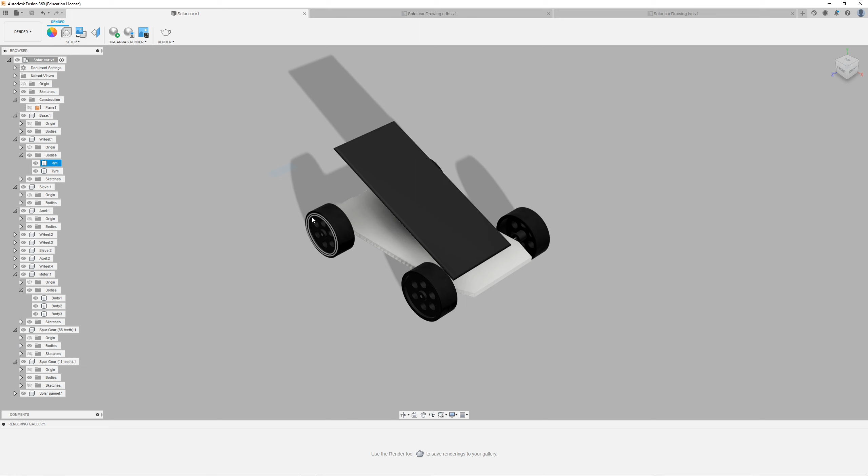Alright, so this is our car over here. If you press this cube in the top corner, you can rotate the view of our car design. Let's press this view so we have a nice 3D view of the car. Let's pick a good zoom level since that's how our render is going to look, so we want it at a nice location.

Let's press the render button, and let's do a local render because my computer is a beast when it comes to doing this, but we just want a standard render. This resolution is fine. Let's press render and see how it works. I might have to pause the video and come back, but I'll tell you how much time elapses. Okay, that took 2 minutes to render.

You could do it through the cloud so you don't have to use your own machine. When you do your render options, you can always pick the cloud render, especially if you have the student edition. It uses render tokens, but you should have unlimited tokens if you have the proper student account, so you're not wasting resources. Laptops don't really perform well in rendering, but if you have a desktop or a fairly modern one, local render can sometimes be faster, because by the time it takes to upload and download the image, it's sometimes quicker to just do it yourself.

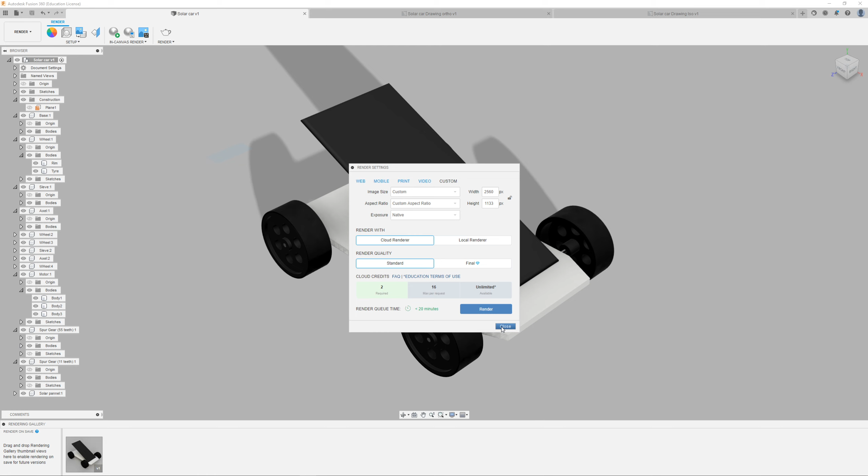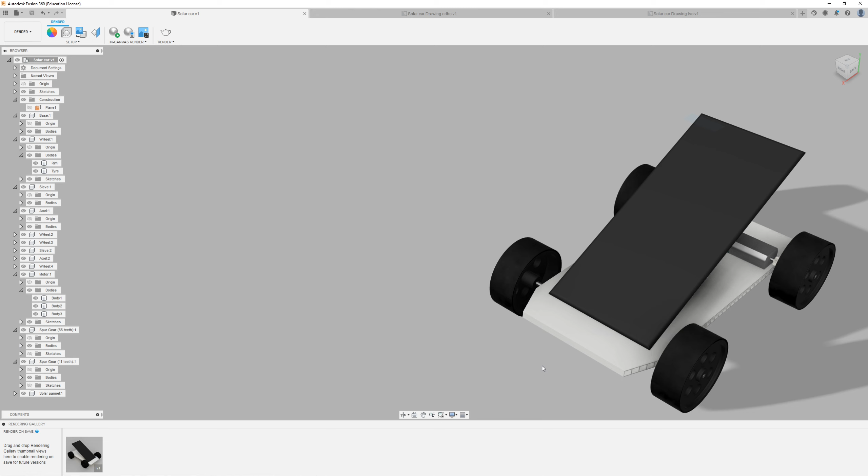But we have the image over here. If I click this, we have a nice 3D version of the car with these lovely looking shadows. I have black wheels though, so it's not looking amazing with detail. I probably should have picked the side with the motor and gears - that would have looked nicer. Actually, let me do that. Let me do a render of that quickly so we can get this lovely detail here.

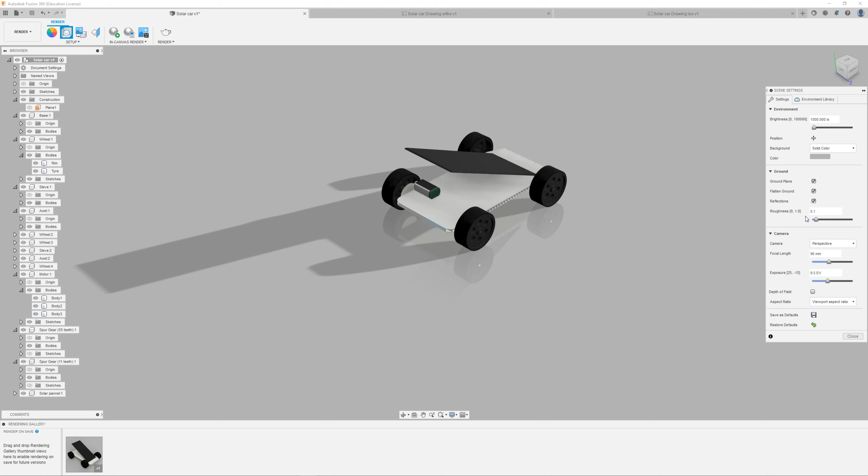I believe we can also add a scene - we can have a light source somewhere. We can flatten the ground, and we can get reflections - ooh, that's starting to look really nice. For our environment, let's do a dry lake bed with skylight. That looked nice. Let's download that environment and put it in there to see how that looks. Just drag it in.

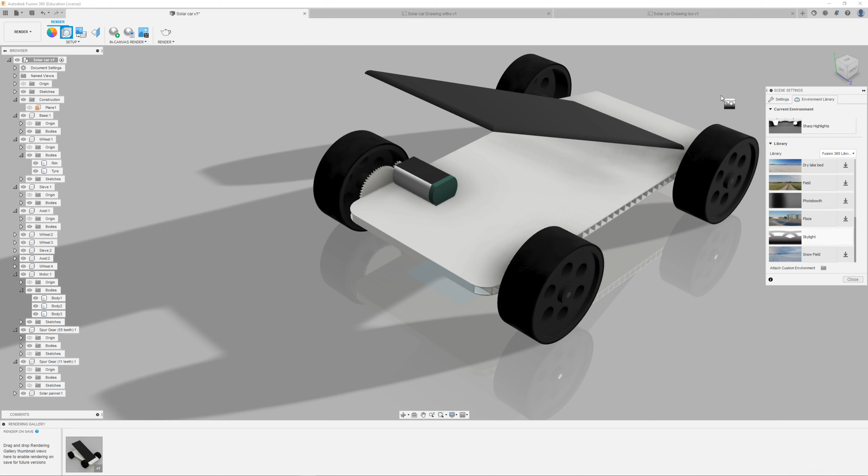Ooh, nice. So let's see if this one looks better, and I'll render this one too - local render, standard render, and I'll see you again in 2 minutes. Alright, that one took a bit longer, about 5 minutes, because there was more color involved.

Let's look at that drawing over here - we should have nice reflections. See, we have the gear reflecting onto the metal casing, which we don't really have in the other one. This gives us a nicer, better shadow underneath the car, which makes it look like a more realistic render.

And again, we can save that. I believe we press this button over here to download it, and we can get that image and add it into our report.

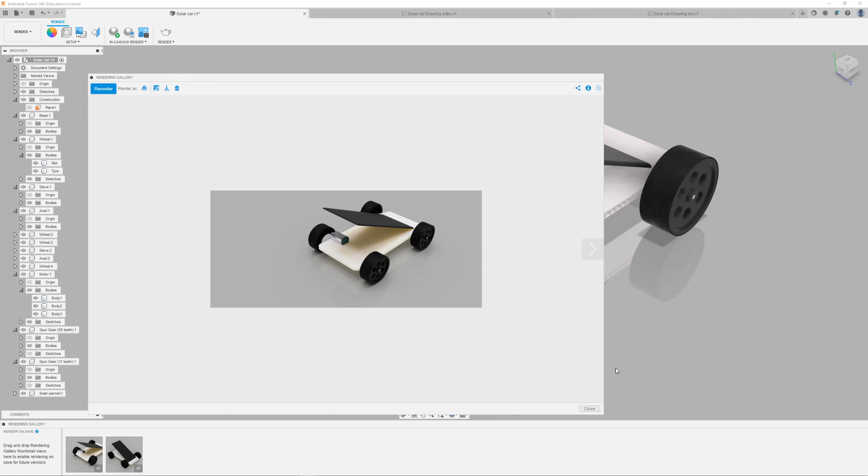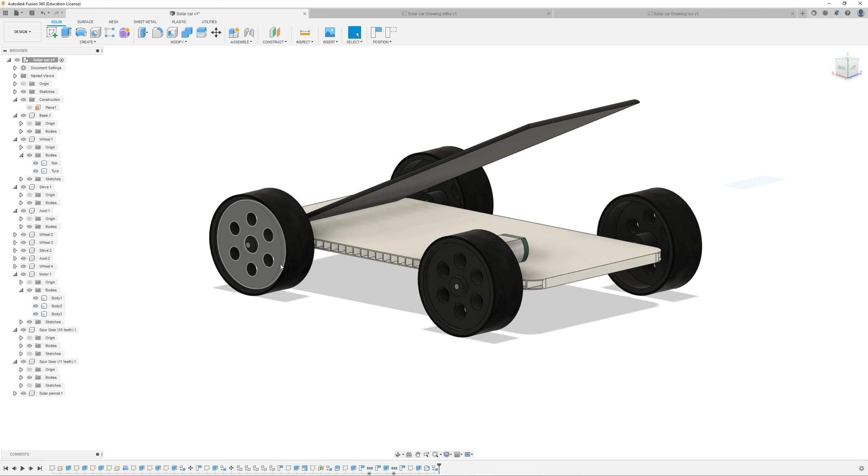So we go back to the design space - your car overview, where you build your car with different components. I'm not going to show in this video how to rotate components because it's not really necessary for this task, but in the future we'll show you how to get parts that rotate relative to each other, using this as a base model. I'll see if I can get a downloadable version of this for you to open in Fusion, or I can share this file so you can use it in Fusion 360, and then get out your orthographic projection and do your isometric drawings as well.